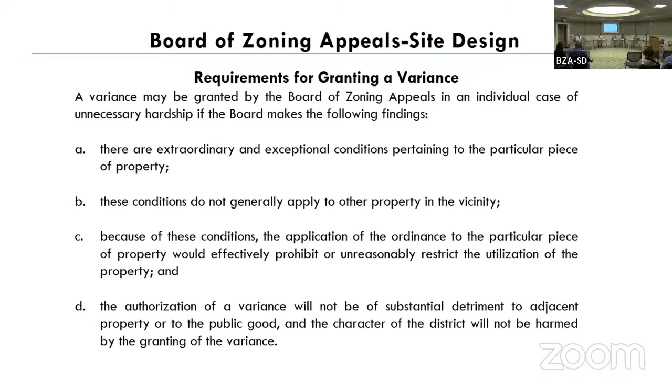For a variance to be granted, the Board of Zoning Appeals must make the following findings. A, that there are extraordinary and exceptional conditions pertaining to the particular piece of property. B, these conditions do not generally apply to other property in the vicinity. C, because of these conditions, the application of the ordinance to a particular piece of property would effectively prohibit or unreasonably restrict the utilization of the property. And D, the authorization of a variance will not be of substantial detriment to the adjacent property or to the public good. The character of the district cannot be harmed by the granting of the variance.

Okay, so that then leads us to our first item, which would be A1, which is going to be a review of the minutes for the May 3rd, 2023 meeting. And any questions?

Just getting all swept up over it. Sorry, yes, it was that good. Oh yeah, so there's no changes.

If there's a motion for approval and a second. I'll make a motion to approve. I'll second. Ruthie was here, so- I was not here, so I can't second. So motion for approval. All in favor? Aye. Opposed? None. The motion is approved.

I just realized I forgot a pen. Does anybody have an extra pen? You can have mine. So what do you mean?

All right, so then there are no deferred applications, correct? Correct. Our next item would be item B1, which is 1471 Folly Road, TMS 33400000052, zoned GB, FRO. Variance from section 54-229.7 to allow a reduced landscape buffer width.

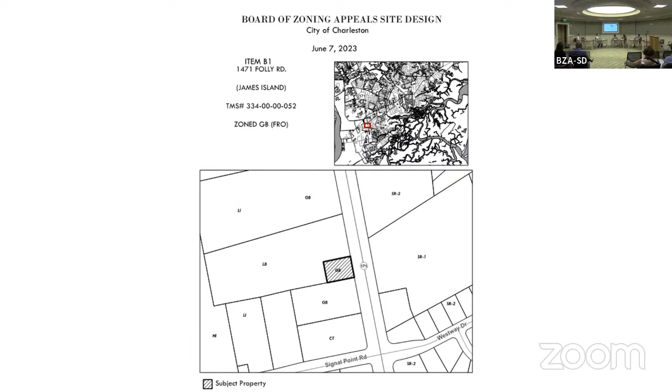So this is the application for 1471 Folly Road. This is a little postage stamp site parcel that fronts on Folly Road. I don't know how long ago it was subdivided out of that larger piece, a church property. It's zoned GB, but it is in the Folly Road overlay district.

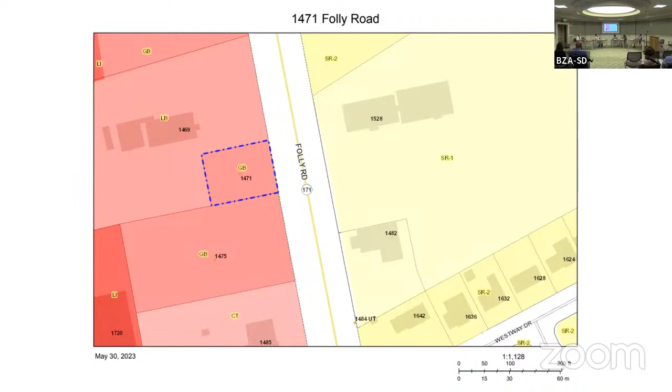Some years ago, the city, along with the town of James Island and the county, looked at a plan called Rethink Folly, and out of that, the city adopted some regulations, which we have in an overlay form. You can see the church property, and then this little site is basically just a grass field.

There's the existing conditions, a small swale that traverses across it. This is an overlay of the project. The owner would like to build a small office and then basically a storage type facility. I'll let the applicant describe more about what the owner plans to store in there. I believe it's collector vehicles, automobiles.

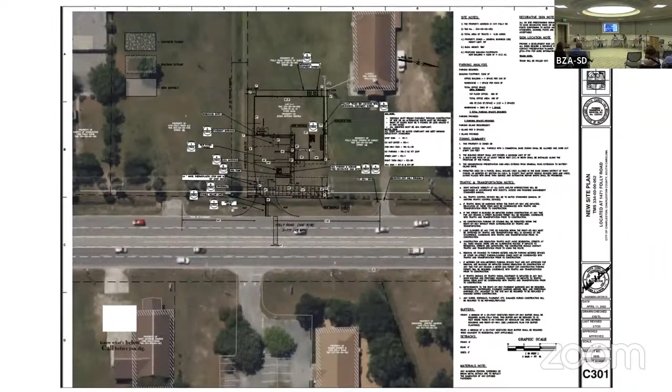So under our standard landscape ordinance, Folly Road is a class 5 road and would require a 25-foot landscape buffer. However, the Folly Road overlay looked very closely at what this corridor should look like in the future with future development, and also thinking of it as a complete street, if you will. All modes of transportation were looked at.

So it states that on the west side of Folly, there should be a 35-foot buffer, and it doesn't specify that that buffer is from an existing easement. It just says from the property line there should be a 35-foot buffer. Within that western zone, that buffer zone, there should be a 10-foot multi-use path.

And landscape. In this case, we have Dominion that has a power overhead transmission line there. So the applicant's working with Dominion on the placement of the walk in that easement. And of course, we have to be very careful about what plant material we choose.

So 35 feet puts a little bit of a hardship on the property. That's the further dashed line back in front of the front facade of the building, on the right of the parking. But that closer dash line is if it were to meet the 25-foot landscape buffer, not adhering to putting it on the back side of the buffer or the easement like the standard ordinance says.

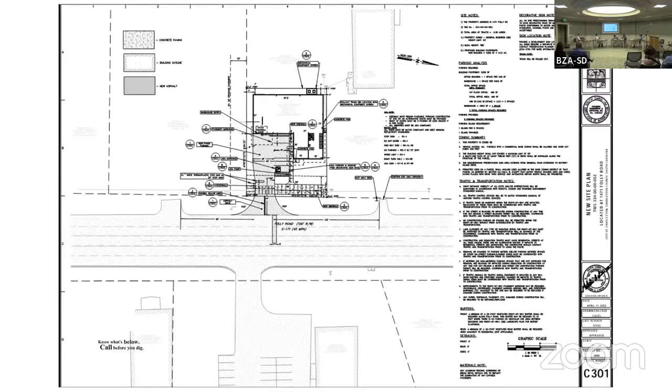So staff feels that there's definitely a hardship in this case. Here's a close-up again, the dimension 25 feet from the property line, the large multi-use path, and then some plantable area.

It's just the parking requirements. They need a handicap space and then the minimum parking, so they have to pull that a little bit closer.

This is going through DRB. It's going to be a very good-looking small building with parking out front. The proposed landscape plan, which I have not verified, is making its way through our technical review committee process, but we asked that they get verification from Dominion on the proposed plant material to be planted within or just outside their easement, so we don't put canopy trees that will someday be severely pruned. And again, it is a transmission line.

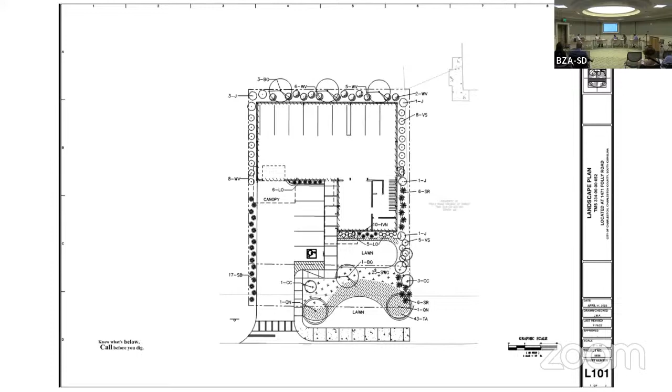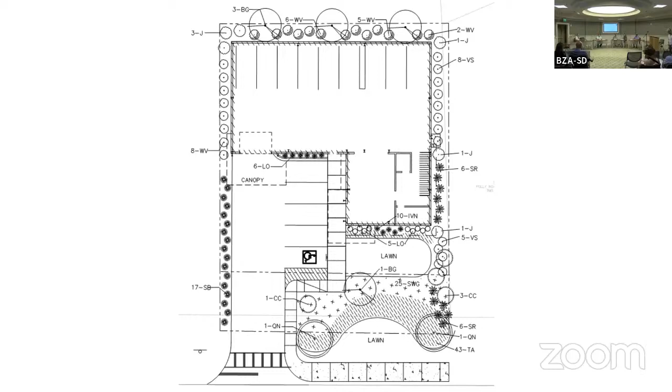Are y'all piping that, the ditch? We're piping underneath the driveway, but not the full ditch. Okay, so the ditch will remain as it is. Oh, okay, it's just, yeah, underneath, I was looking at the driveway landscape plan. It's actually between the sidewalk and Folly Road where the ditch is. So we're gonna pipe the driveway itself, but the rest of the ditch will remain.

Questions or discussion?

I'll make a motion, we move to approve the staff recommendations. I'll second. Motion by Amanda, seconded by Ruthie. All in favor of that motion? Aye. Any opposed? It's approved, unanimous.

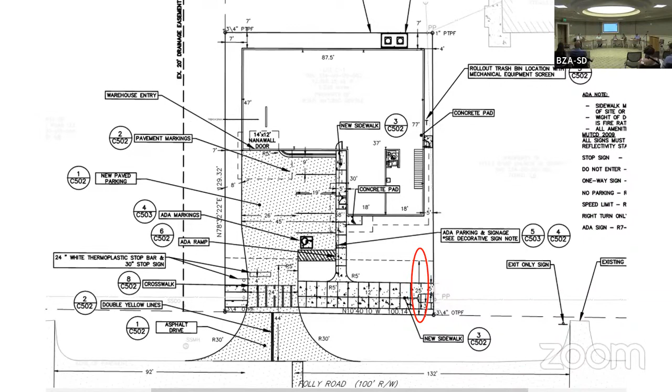Thank you. All right, our next item will be item B2, 1137 Folly Road. Request a variance from section 54.327 to allow the removal of 4 grand trees, and a special exception from 54.327 to allow the removal of 1 grand tree. It's TMS number 33708000119, zoned LB.

This property is located on Folly, just south of Pittsford Court. There's actually a little parcel that's owned, so it doesn't touch Pittsford. It's due north of the little strip mall that has the Kickin' Chicken in it, if you're familiar with that, before you get to the Kmart. You can see that it's basically a narrow triangular shaped lot.

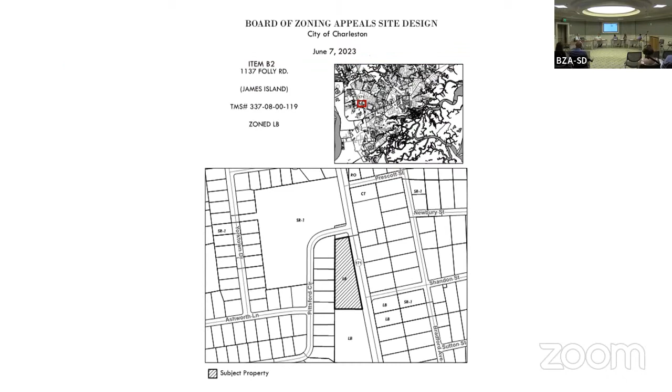Zoned LB. I think over the life of my career here at the city, I've probably seen 3 or 4 different plans for this property. Nothing's ever gotten out of the ground, but I think this one may have some momentum behind it. This is the application.

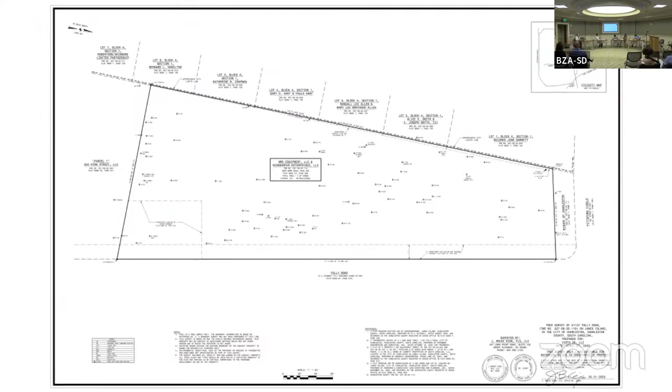The existing condition, minus the contours and trees. This is the plan overlaid on the grand tree and protected tree survey. So what's unique about this is obviously the shape.

When the city developed the shopping center to the south, we worked out, I don't know if it was SCDOT driven or just the ownership groups at the time, but as you can see, the proposed driveway is an existing driveway to the left, and it's on an easement. So folks can pull in that driveway and then make a hard left to enter the shopping center parking lot. So that's kind of a fixed element.

DOT, what else is unique is that where you see what appears to be a detention pond is actually a small isolated wetland. There's a pipe that leaves that wetland, so water flows out into the pipe into the Folly Road system. That complicates the design of anything that were to occur on this site because of the city's stormwater management requirements. So they're actually working with the adjacent neighbor to not drain to Folly Road, but drain into their system within their shopping center.

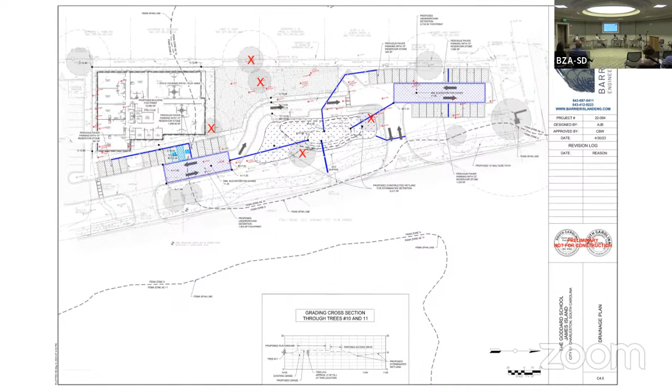The drone can get up closer to some storm damage in the crowns.

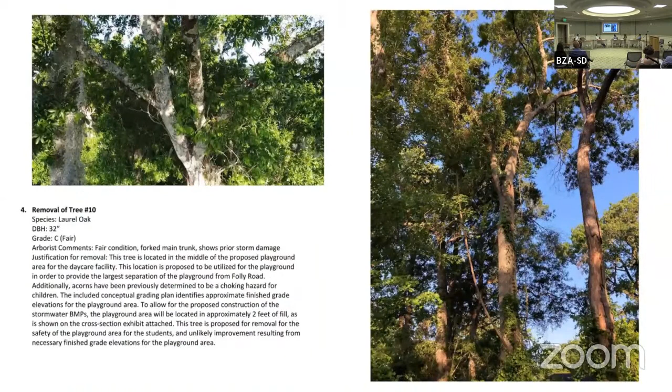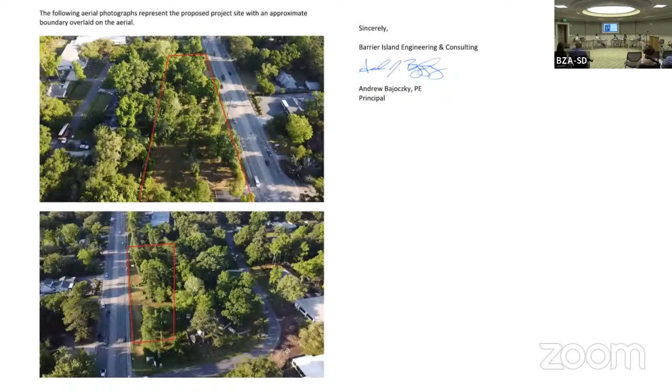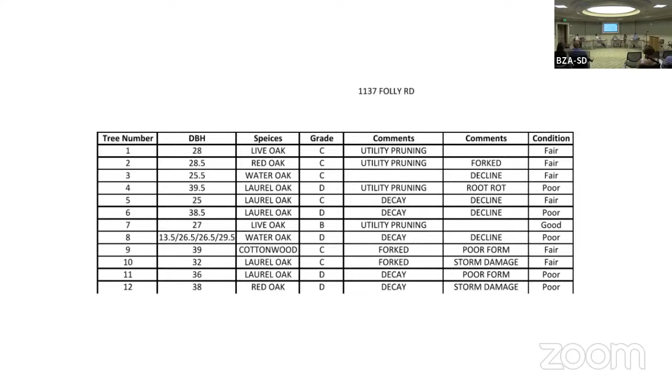Staff recommends approval with the notion that the hardship is met with the extraordinary conditions of the site, the wetland. They've spoken to the neighbors. I don't think it will be a detriment to the public good and so on, but they must plant 127.5 caliber inches of native canopy trees on the site. That's going to be planting a forest, and that's okay—young trees, good quality young trees. If they can't get all those inches on site, we'll possibly entertain a contribution to the city street tree program.

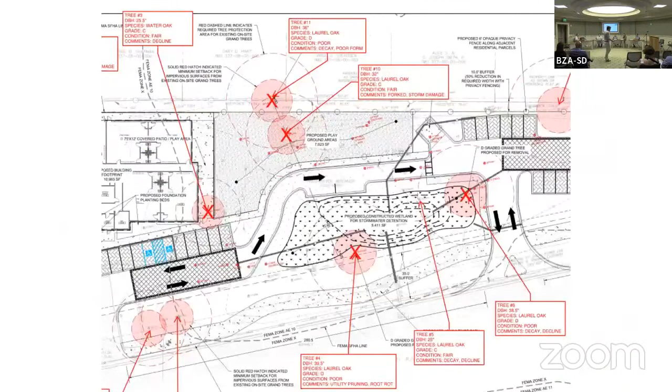The applicant present, would you like to be heard? We just brought a full-size sheet. If any of y'all want to look at this up close, otherwise I'll just leave it down here.

My name is Andy Bajowski with Barrier Island Engineering. I also brought a couple of items from neighbors, and I kind of explained that in the email. That's a letter of support from the neighbor immediately adjacent to this tree that's on the north property line. It's so close to the property line, it's hard to even tell if the tree is fully on our side. We met with them individually to gain their interest or opposition to removing that. So that's what the email is from there.

About a week and a half ago, we held a public meeting with the neighborhood, handed out flyers, had one person attend—that's the sign-in sheet, the second sheet there. The only question she expressed was in regard to the tree adjacent to the neighborhood sign up here, which is not actually on our property or part of this request at all.

I think Eric did a pretty thorough job of trying to explain the troubles here with this site. The wetland in the center certainly proposes a little bit of a challenge. We're proposing to do a constructed stormwater wetland here for stormwater detention, water quality, and to satisfy the stormwater ordinance's LID requirements, as well as under a combination with underground detention for special protection area. So it kind of blocks us into a strange stormwater layout.

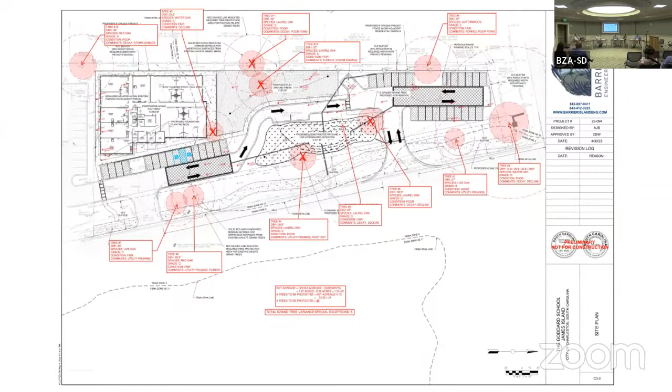But I'm in support. I make a motion we move for approval with the staff recommendations. Second. For approval with staff conditions, by Amanda, seconded by Jeff. All in favor? Aye. Any opposed? Unanimous. Thank you for the presentation.

Our next item would be item B3, 9 Cunnington Avenue, TMS 464-14-00-119, Zone UP. Request for a special exception from section 54.327 to allow the removal of 1 grand tree.

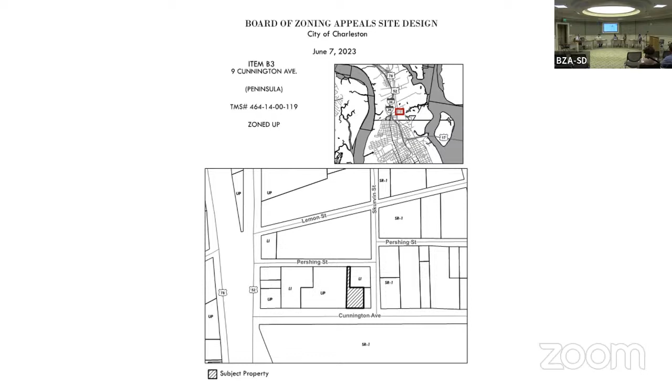Eric: This is the application submitted. This property is owned by the City of Charleston, a project under capital projects through Housing and Community Development. You can see this is a flag-shaped lot with the majority of the building or property on Cunnington. Zone UP was an effort done a few years back, an incentive-based zoning.

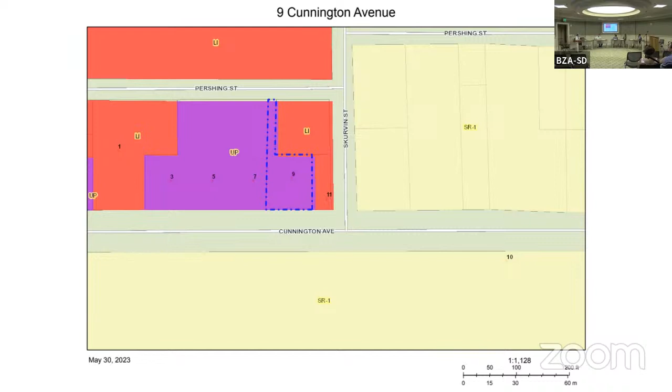Basically, if you wanted to do higher densities and height, but this is going to be the future home of the Hope Center, which deals with the homelessness crisis we have in Charleston and the region. The structure has been demolished, as well as the other 3 homes owned by the city to the left, which will become a multifamily project, but the Hope Center is phase 1.

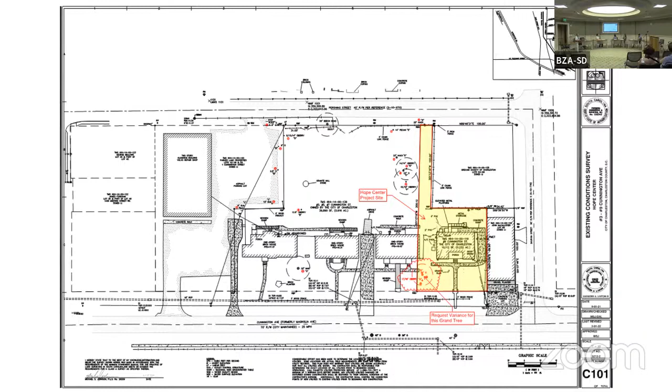So we're dealing with just the yellow area, and the structure has been removed. Here's the layout: administrative type offices, meeting space, and then the little structure that goes up the flagpole portion is actually enclosed space for the needy to take refuge from the weather. It will be managed through the operations.

In the front right or front left corner, you have 1 Water Oak surrounded by Chinaberry volunteers. I assume it proved to be of a size to be considered a grand tree. Chinaberry we consider invasive and want to get rid of those, but the Water Oak is the special exception.

It's a 26-inch leaning tree. I don't know if there was an old fence line there or something, but these trees just became volunteers and grew in size.

Staff recommends approval with the condition to plant 13 caliper-inch native canopy trees on the project site. Must relocate the palms - there are 3 palms on the site that can be transplanted; if not, they plant new ones if they don't make it. Must also provide a landscape plan for staff review and approval.

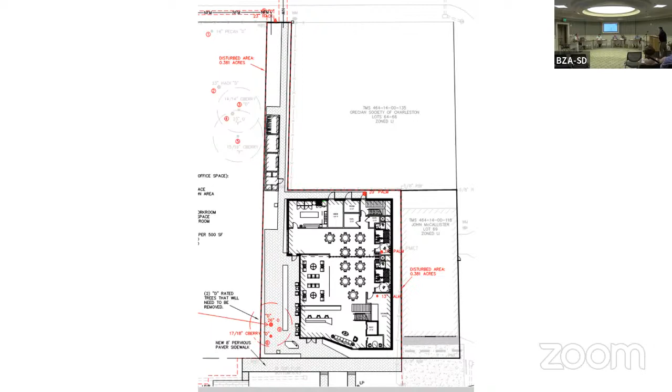Mike Johnson with Forsberg Engineering. Eric covered everything. This is, like I said, a public project that the city needs to help support the homelessness effort. The tree is a D-rated tree. Other than that, it's a slam dunk. I'm here for any questions you have for me.

Awesome, thank you. Anybody else present who'd like to speak in favor? Any opposed? The application should be closed to the public and go to the board.

Questions, comments, or a motion? I think it's a special exception - it doesn't look very grand from the picture. It's a special exception, so it's fact finding versus the variance test request.

I might just add that you see kind of a plaza area to the west, planned to someday be in concert with the multifamily development, so there'd be an area. What is that white line, like a seat wall or something? It's a planter, a raised planter, so they can plant vegetables and all. It's right in the middle.

This will relate to the structure and the multifamily, which we don't know what that is yet - they're just blocking it out, basically. That's right.

Other trees - will they be coming in for those? They will be. I think one is a D-grade magnolia. I've been on site, a lot of this is hackberry and chinaberry back in here, but this magnolia existed in the front yard. It's got a big, huge cavity in it.

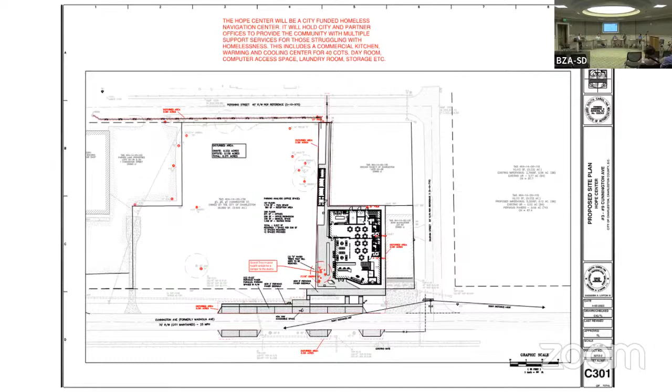All right, so our final item on the agenda is item B4. It's Clements Ferry Road, Cainhoy Peninsula, TMS 271-0001-035, Zone GB. Request for a variance from section 54.327 to allow the grand trees.

This is the application, with a little letter for the hardship. So for some of you this may jog your memory - we've dealt with this entire tract now twice. It came through for the original approvals for grand tree removals, and then they just extended that approval not too long ago, I think early last year.

The owner of the tract had been in negotiations with the city on providing a lot for a much-needed fire station in the Cainhoy Peninsula area. So they did not address what they thought would be and could be the city parcel. We addressed a lot of grand trees, but we didn't do this section.

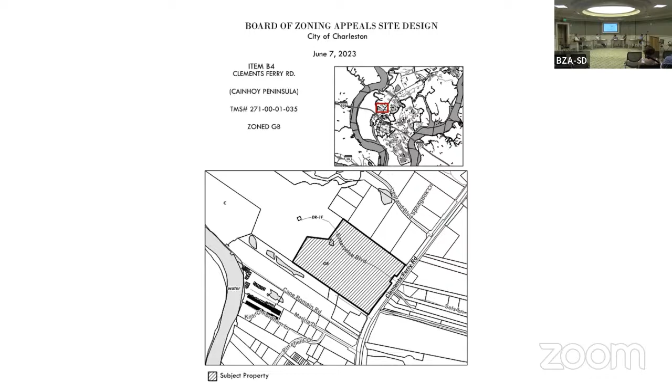I'll explain further here. In addition to this project, there's a lot of history - the city, Berkeley County, and SCDOT have been in negotiations for years about how to improve this lower section of Clements Ferry Road and where to introduce a signal, with a lot of back and forth regarding Marina Drive. The final decision was to have it associated with this future development, aligning across from Beresford Run, and have the signal there.

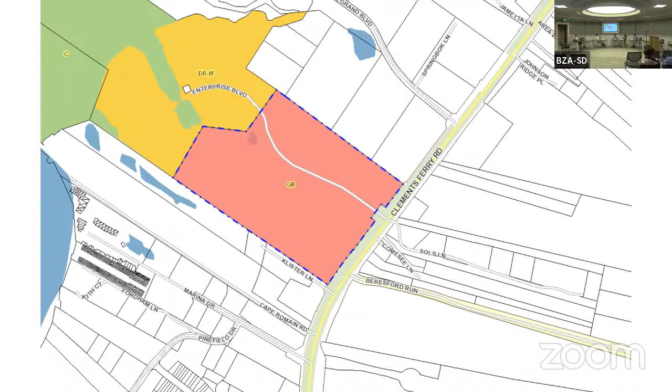The firehouse wasn't driving all of that, but it was part of the discussion. So you can see it's a wooded site. We have Cooper River Farms, the multifamily development at the rear end of Enterprise Boulevard, and some kind of truck depot to the south.

So this is a phase of many that are coming through our technical review committee process. I'll just call this phase one. This phase subdivides the property, creates a public right-of-way opposing Beresford Run, and provides a connection to the south, and then also a drive that connects to the north to Enterprise Boulevard. You may remember you saw a whole concept plan for multiple buildings on this site, ranging from retail to office to eateries.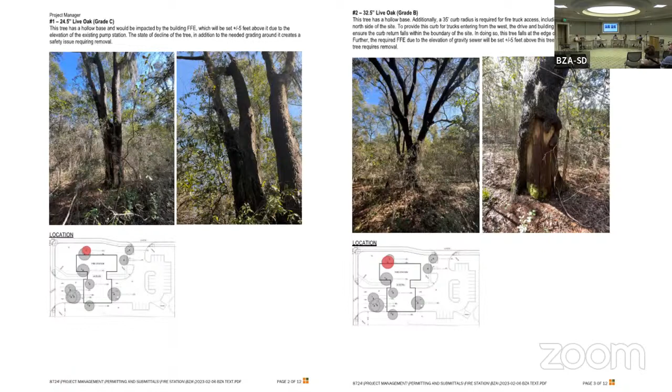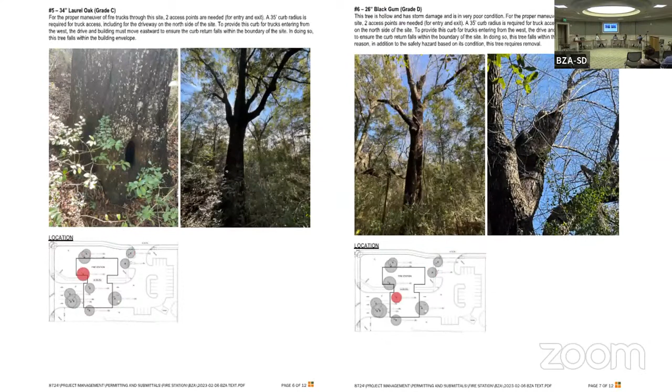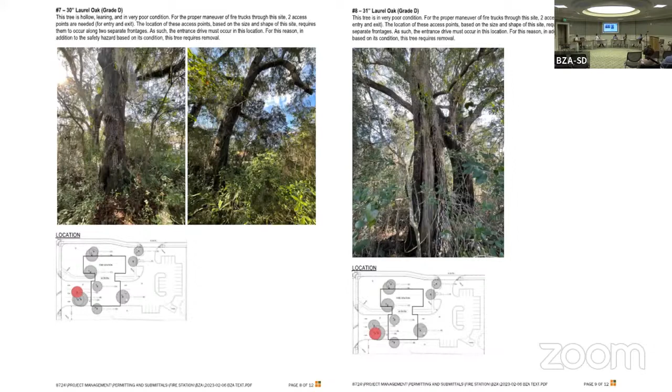An F, storm damage, cavities, storm damage. Lightning strike probably, most likely. It's got half a crown that's viable, still green tissue on it.

So this is a letter that I sent you all this morning, having received it from our project manager, explaining more about the history and the private developer working with the city on this site.

The staff recommends approval with the condition to plant 255 caliper inches of native canopy trees on the site. That's going to be impossible, basically. I don't think the city is treated any differently. I guess they'll have to build this cost into the budget, and they'll then basically cut a check back to the city street tree program, and the city can plant trees elsewhere, but must plant the necessary amount.

We're not sure of the exact acreage, so we're building into the condition here that the protected tree requirement, which most likely won't be met. Maybe a few trees around the perimeter. We'll work that out based on the size of the property and the calculations, and then must provide a landscape plan for staff review and approval.

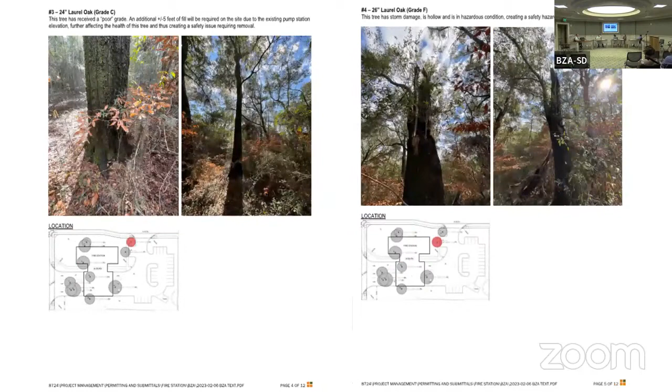All right, thank you, Eric. Applicant present. Mr. Globin with Seamon Whiteside.

I'll outline a couple of things from the letter that we wrote, but I think they're just pretty much history of the site, whatnot.

The first point is there's ongoing negotiations between the property owner, who's Cato, and the city of Charleston, and if successful, the parcel plan is for a future fire station. The fire station will be accessed from the south by proposed Tongue River, a proposed road, future name Tongue River, which connects to Clements Ferry Road, opposite of Beresford, for the future intersection. As Eric noted, Clements Ferry Road is about 5 feet higher because of the widening over the last 5 years. So that's the storm drainage issue with the grading, and then also gravity sewer to connect to an existing pump station at the rear apartment complex is also an item that's driving the finished floor elevations.

Two items on the variance criteria I'd like to outline: number two, we stated that other properties within the vicinity do not show the same quality or distribution of grand trees. Just north of this project site, on the parent parcel but just north of the proposed road, there's a large cluster of grand trees that will be planned to be preserved for the overall development. You can kind of see them right there, all the trees north of the red line.

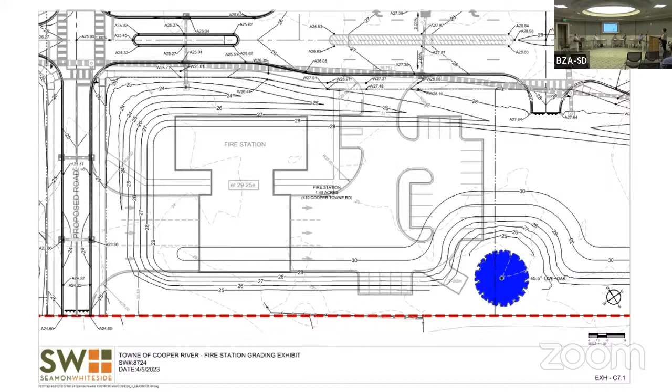So is the existing one the one that was sort of temporary? That's the one that's on Marina Drive. Okay, that was one of the first things out there, right? That goes all the way down, that's sort of a long stretch. Well, is that even in the city? I think we leased or released that building, and we're releasing on Marina Drive. If I back up here, maybe I can pick it up in the aerial. Yeah, that's going back a ways.

Let me get my bearings right. So here, this was critical - this was negotiated with Berkeley County, the city, and SCDOT, because there was a lot of push to have it here at Marina Drive. I believe this is the contractor. Yeah, so here's Pine Drive. Yeah, so this is our fire station right here, which we rent or lease. And I don't even think that's in the city.

Right, but it's serving a huge population. Oh yeah, especially with the growth. Yeah, I mean, so I understand the need for it. And I would like to note that according to the fire station, it's not yet moved.

Well, I don't, okay. Are they all variances? Yeah, it's a set of variances. Yes, variance for all of them.

I don't like it. Especially when we could see a master plan come through and then something like that was basically omitted from what we were looking at initially, which is nothing - no reflection on the fire station aspect. I mean, I don't know how that happened, but if it gets approved, I, for one, would stand firm on our previous statement of no more grand trees taken out of this overall development. I don't care what doesn't fit.

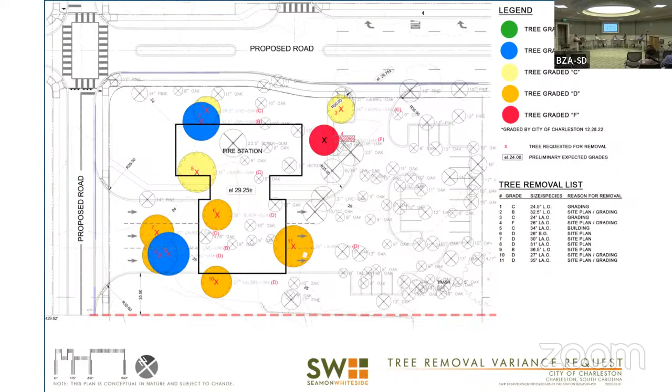We don't have that written on our paper today for some reason. Well, they're the owner. Seamon Whiteside, I guess representing Cato, not necessarily the city, is the applicant. So can't you make Cato pay?

That's above my pay grade with the negotiations on the lot. We have a hand raised, perhaps someone could respond to that if necessary. Okay, please state your name and address.

My name is Gary Collins, Seamon Whiteside. I have as much history on this property as when it started.

In response, we would probably not have created the parcel in this configuration if it wasn't for a fire station. I understand the comment, but we would have had a plan that potentially would have adjusted to not deal with those trees if not for the need for the fire station and the proximity to Clements Ferry, and some of the other conditions that a fire station required, as well as the north-south connections that are part of a larger master plan to make those work.

So dimensionally, that was all planned, and then in the hope that a fire station would work, I did probably another dozen scenarios of how a fire station may or may not work on this property. I understand where you're coming from, but that's the reason the owner is submitting the plan, because it hasn't finalized. A lot of these things would have been different if it wasn't for the fire station; we'd have had a different scenario to address that. Not the grading, perhaps, but that. So that's what I would just ask. Thank you.

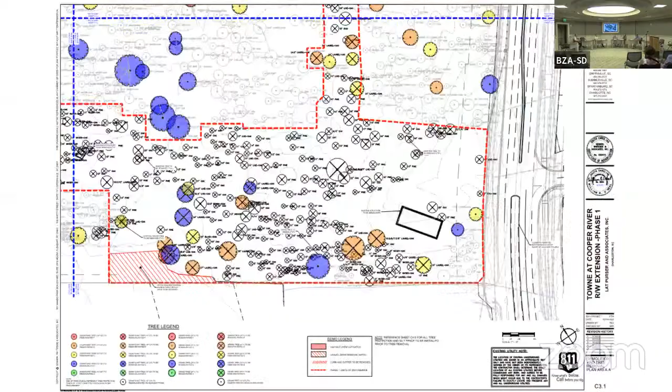It's the first phase of the development for the road work and a master stormwater design and pond. It's been through the city's hands quite a bit, and we are planning to accommodate for stormwater in the master pond, which definitely gives a little bit of leeway for the site to potentially save some extra trees.

There are no other questions. There is a motion from Ruthie for approval with conditions. No other discussion. Is there a second on that? I'll second. Ruthie did the motion, so it's a motion for approval, seconded by Jeff. Can you put your recommendations back up there?

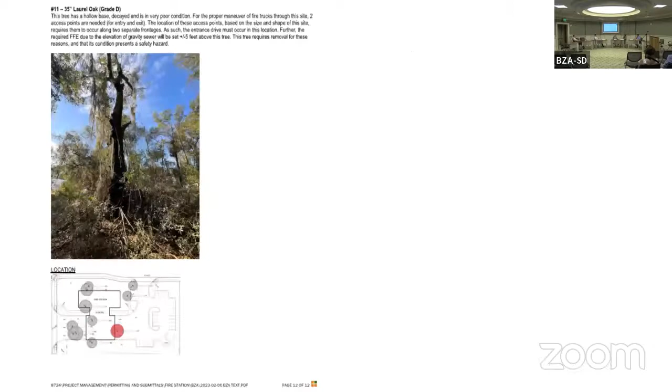I guess I would just say, though I'm sure Beth would do this anyway, when developing it, to try if there's a possibility of retaining any of the trees around the perimeter. Yeah, I think the best hope there, based on the grading plan, is the southern common property line with the neighbor—there's a little buffer there.

Let's go to vote. All in favor of the motion for approval with staff conditions? Aye. In favor? All in favor? Any opposed? Grudgingly, it's approved. Thank you, grudging favor.

Thank you. So, there's another one out there, right? Another fire station? That'll end the meeting. Can we? Yeah, isn't there another one out? There's one on, is it Cape Further Road? Way up, way further.